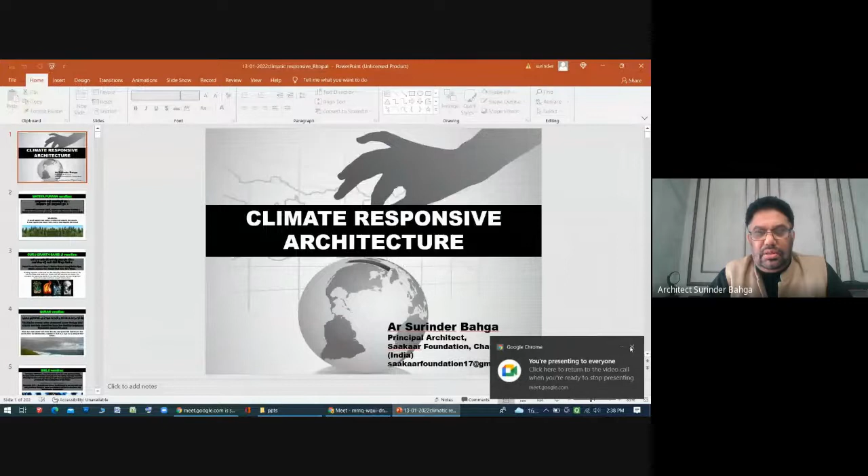First of all, I am grateful to Government Women's Polytechnic College for giving me this opportunity to share my thoughts on climate responsive architecture. Let me start now.

I would like to mention that in most of the holy scriptures of India, there's a lot of emphasis on saving Mother Earth and saving the environment. These are lines from the Puranas, a famous Hindu scripture. There is a shalok in the Puranas which highlights the importance of a tree in our lives. Likewise, in the Holy Guru Granth Sahib, there are a lot of shlokas, a lot of verses emphasizing saving water, saving Mother Earth, saving the environment.

And in the Holy Quran also, there is an ayat which says Allah has sent down rain from the sky and given life thereby to the earth after its lifelessness. Indeed, in that is a sign for people who listen. So these are the lines from the Holy Quran.

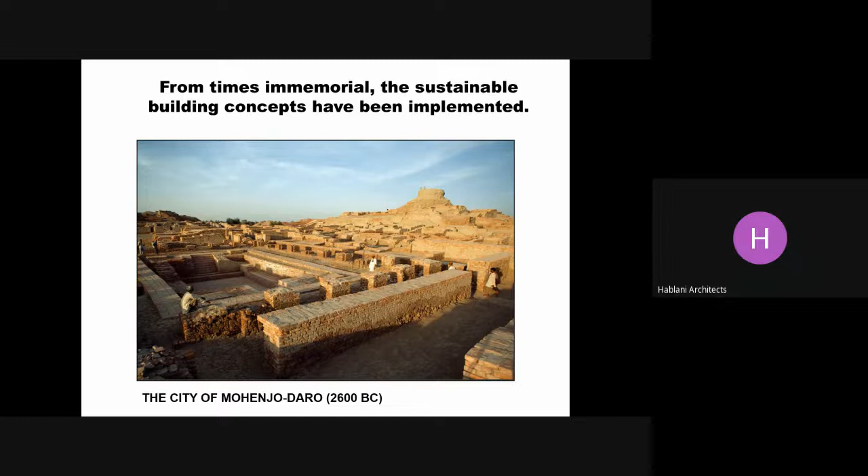Now let's have a look at the historic work done by our forefathers. This slide indicates the Mohenjo-daro township, which was built in 2600 BC. You can see from this picture that the planning of the building is done to suit the local topography, to suit the local materials, to suit the local wind direction, and all that. Accordingly, these houses were designed.

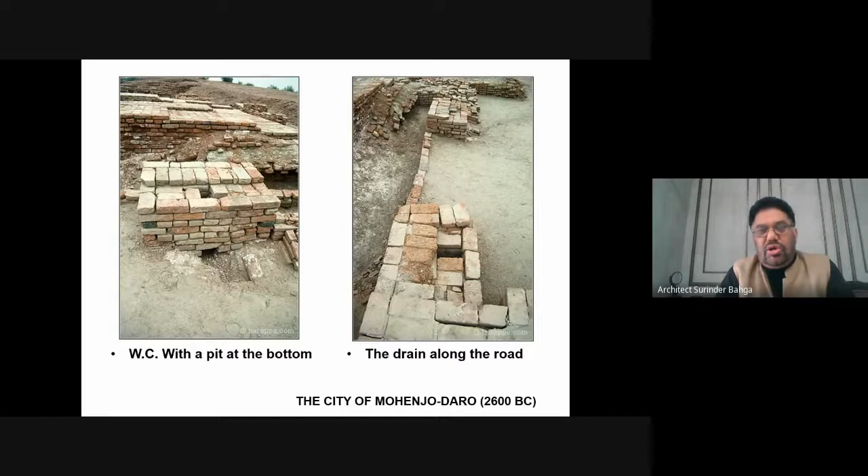You can see very modest houses, simpler, with jalis, and there are no windows and narrow entrances and no decoration. Mohenjo-daro township was the one which had a proper drainage system designed and in place. The digging done of this township indicated that there was a proper drainage system well laid there.

During the Mughal period, from 1526 onwards, for nearly 200 years, the architecture of India reached its full perfection. The work designed and executed during that period had passive cooling and proper energy efficient features, as you can see in this Fatehpur Sikri complex, where all the openings are protected with chhajjas or projections.

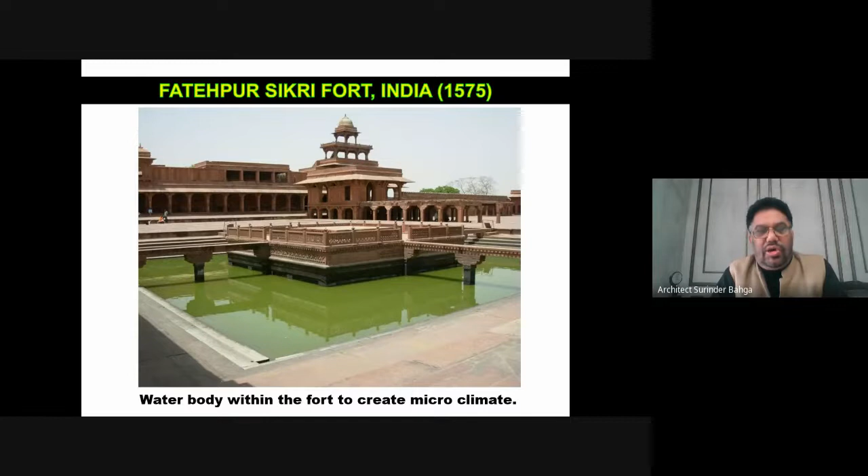There are small water bodies to create the microclimate, and in these Mughal buildings you can see these kind of deep verandas.

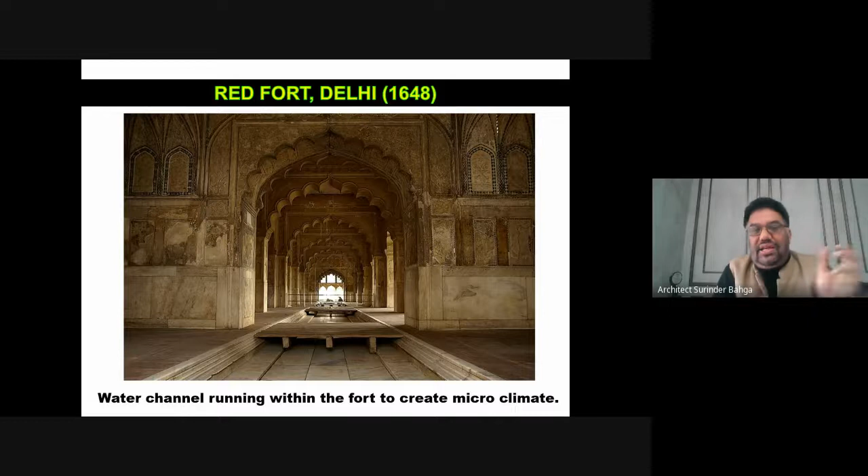In this slide, you can see a water running channel in the Red Fort, Delhi. In those times there was no electricity, so in order to cool the interiors, this water channel was operative.

In Jaisalmer, Rajasthan, these Havelis were built. Most architects have studied this. You can see the typical facade of this building, the Haveli, with self-shading balconies, small openings, local materials, jalis - all these features are there, producing architecture suited to the desert region.

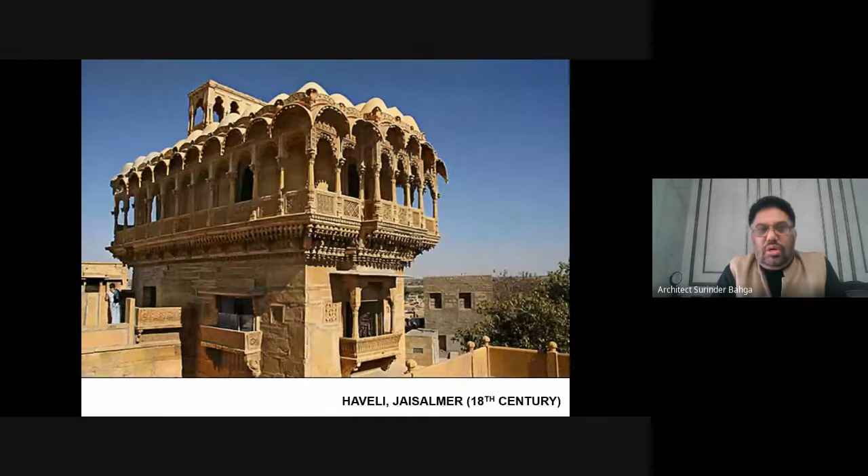Look at the facade of the Haveli, how it was intricately woven and self-shading. And they ensured courtyard planning because it was most suited to the Indian kind of climate.

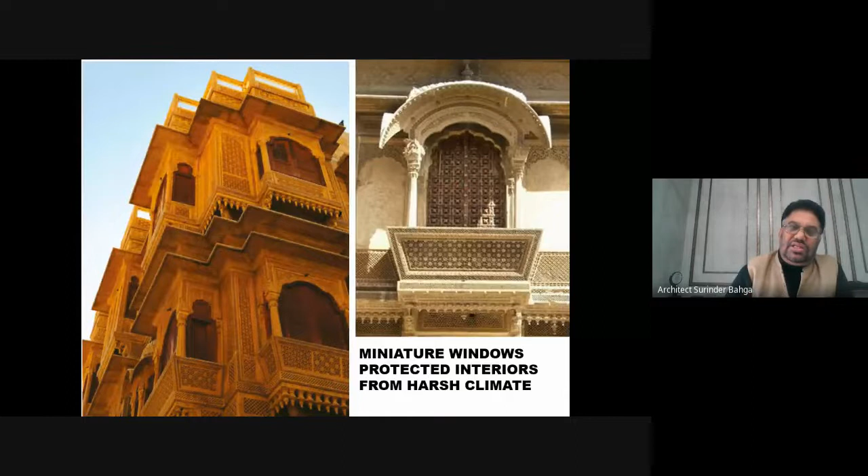How nicely they have decorated the facade and the balconies. The balconies are not only protecting the windows, but are also aesthetic elements in this scheme of things. And they opted for narrow streets because they are self-shading.

In Rajasthan, Gujarat and many other parts of India, our forefathers have shown us how to conserve rainwater with these kinds of rain collection tanks, which are aesthetically very pleasant and functionally exceptionally good. You can see these kinds of step wells in most parts of India.

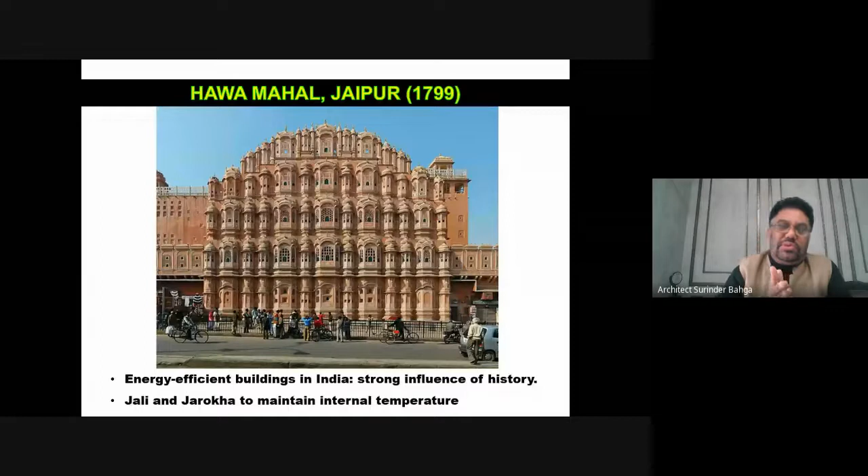Coming to Rajasthan again, this is the Hawa Mahal, built in 1799. These balconies were meant for royal women to remain in parda while they watched processions and other things happening on the street, yet they could enjoy the cool breeze. It was a wonderful experiment, because at that time there was no electricity.

Down south, in the 17th century, this Jahangir Mahal at Orchha - you can see in this picture very thick walls, projections, and small openings - all these features were there.

During the British Raj, in 1927, the famous British architect Edwin Lutyens designed this building, the famous Parliament House of India. You can see there's a veranda running around, which is a circulation core, meant to protect this building from the harsh climate. And inside you can see small windows.

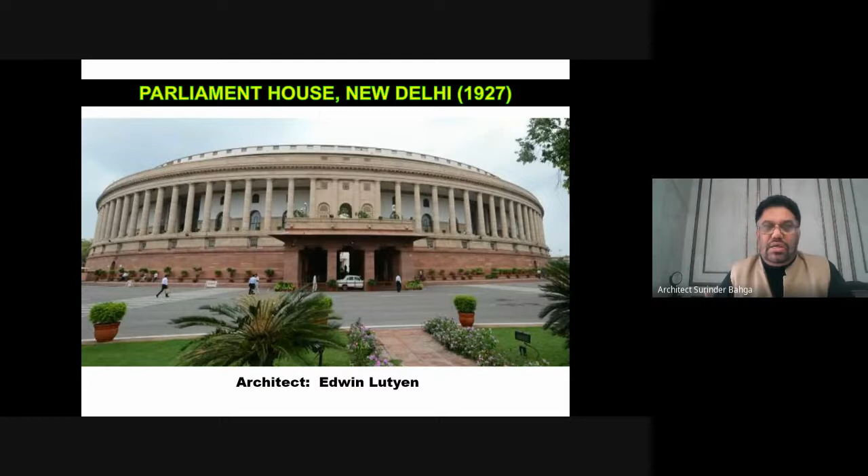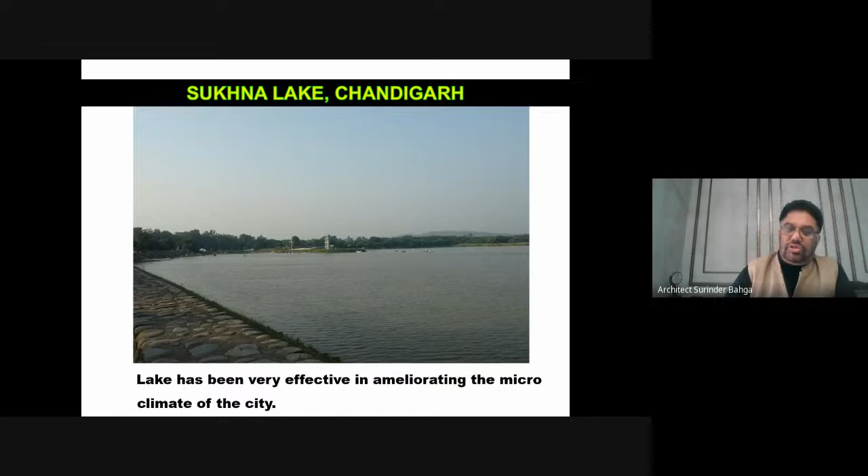Corbusier also created an artificial lake by damming two seasonal rivulets; rainwater was dammed and he created this lake, called Sukhna Lake. This lake has not only improved the water level of the city but also improved the vegetation around, and the microclimate of the city is also considerably improved because of this lake.

Chandigarh is probably the only city in India which has 35% green spaces. I was reading an article in Hindustan Times one day that said Kolkata has only 2% green spaces - look at the comparison of Kolkata and Chandigarh. And Chandigarh, to my mind, has nearly 1,700 parks in the city, which is quite a large number.

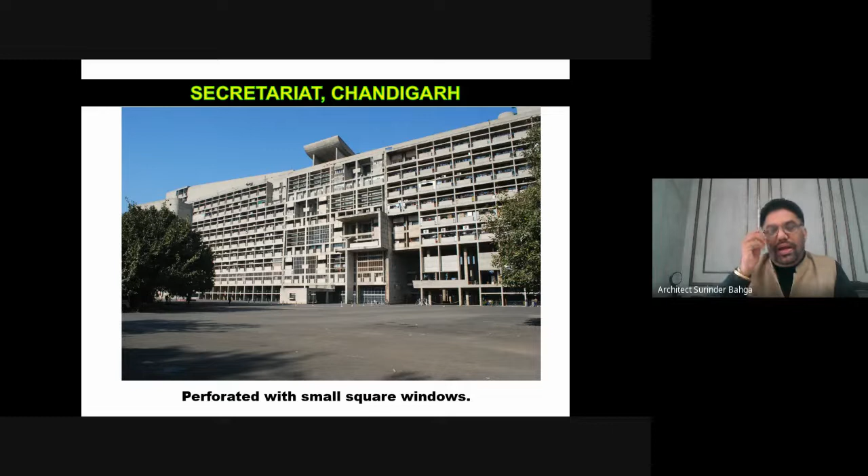This is the Secretariat complex. The glazing is about 3 to 4 meters deep. You cannot see glazing in this elevation. And there is a terrace garden on the top, and this building is oriented in the wind direction. Whenever there's any wind movement, this building behaves very beautifully.

In the middle of the 90s, famous architect Charles Correa designed this LIC building, and when it was executed, there was a lot of controversy about why he is using so much glass in a hot climate. But Correa has used glass very sensibly. He used glass only and only on the north side.

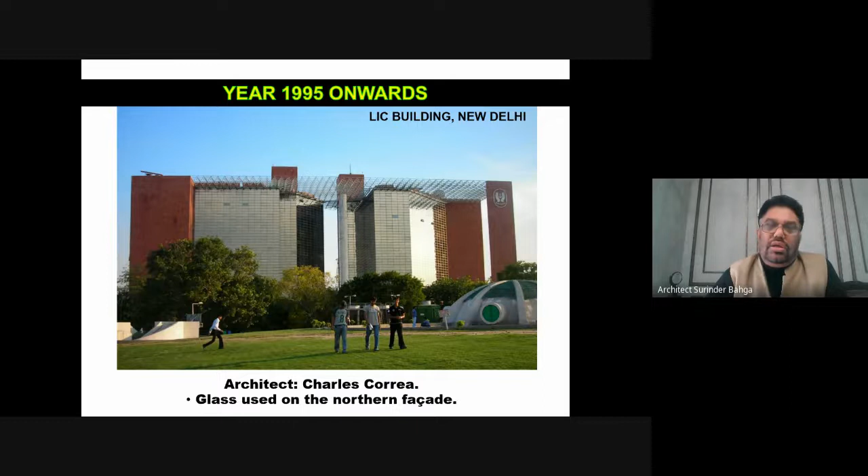And this is a building in Mohali. The architect of this project is a close friend. He designed a very, very nice building here. But when the building was almost 60% completed, a bureaucrat forced the architect friend to put glass all around. Because he was not agreeing, that architect was changed at the last minute, and a new architect was placed who agreed to put glass all around.

The positioning of the glass has nothing to do with the orientation. It is wrapped all around, and the building works like a furnace.

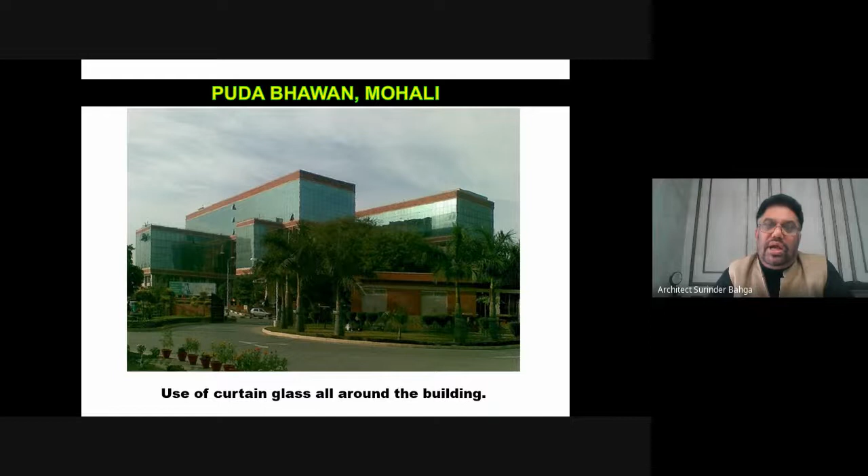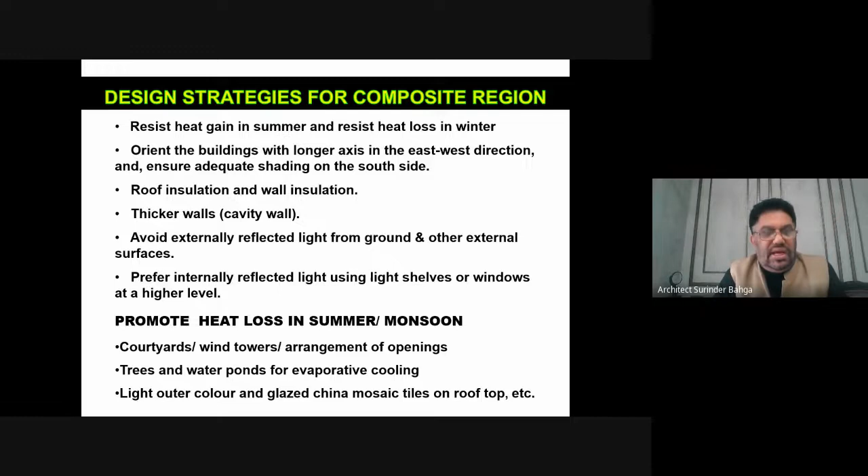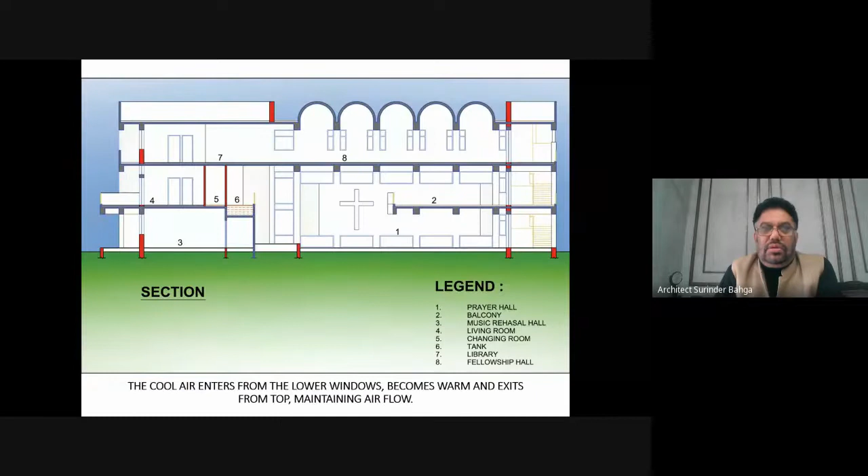You can see we introduced a cavity wall all around. In this plan and cross section, you can see the windows are deeply recessed, very narrow and small, with minimum use of glass and light colors. You can see the interiors - there's ample light during the day, but windows are minimal because they are properly calculated.

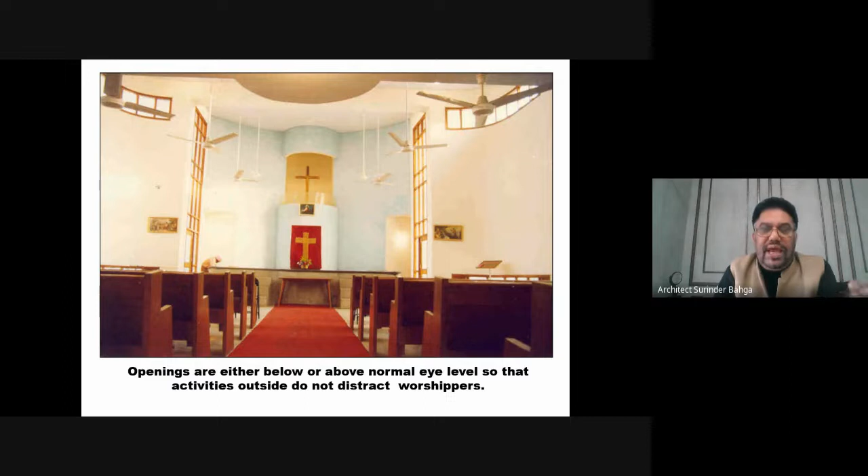The next building we did is in Punjab, Mohali, which is again a composite region. This was a Bal Bhavan, children's home. Here, because the western direction is very dangerous climatically, since the western sun emits a lot of heat which goes into the building, what we have done is club all the toilets and put all the toilet mass on the front side, which is the western direction. So the toilet blocks absorb the heat and the dormitories remain cooler.

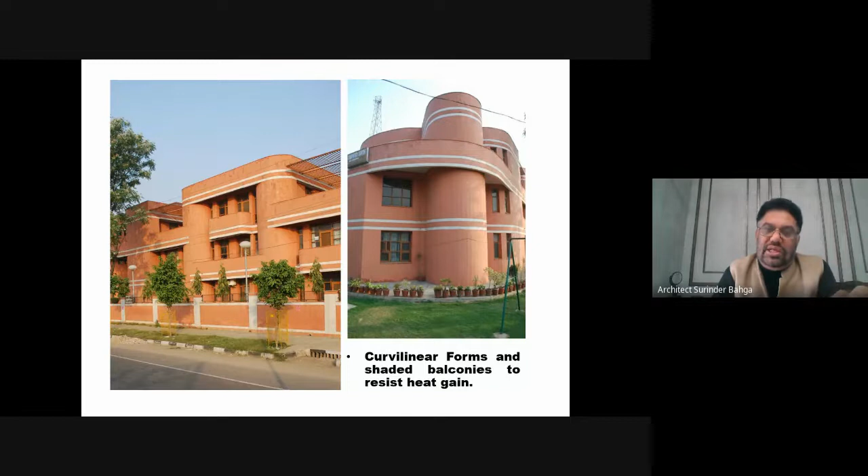Apart from that, you can see the deeply recessed or projected balconies and roof projections protecting the windows in these photographs. Windows are limited and put only where actually needed, and they are properly protected. Existing trees are properly saved on the site.

The next building in this category is a public school. A competition was held to design this school, and we won this project because the design brief involved a site with a large number of trees. This school belongs to the former Chief Minister of Punjab, Captain Amarinder Singh's family, and his mother, referred to as Rajmata, was the jury chairperson. She gave a brief to all participating architects that she wanted a building which would not cut a single tree from the site. So we designed this junior school building in a manner so that not even a single tree was cut.

While other architects gave a very flowery design for this junior school, widely spread out and cutting trees - somebody cut 10 trees, somebody cut 5 trees - in our case hardly any tree was cut. So that was the reason why we got this project.

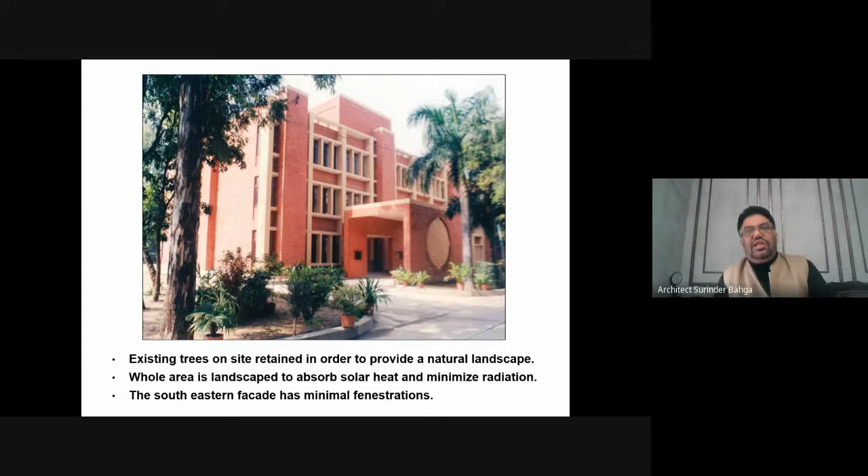You can notice in this facade of the school that again we have protected all the windows with proper projections and louvers. We opted for this design vocabulary because the existing school was designed by a very famous architect, J.K. Chowdhury, and this was an extension block, so we had to match the architecture with his school. J.K. Chowdhury designed some buildings in Punjab University and also IIT Delhi - he was a very famous architect of India at that time, in the 50s.

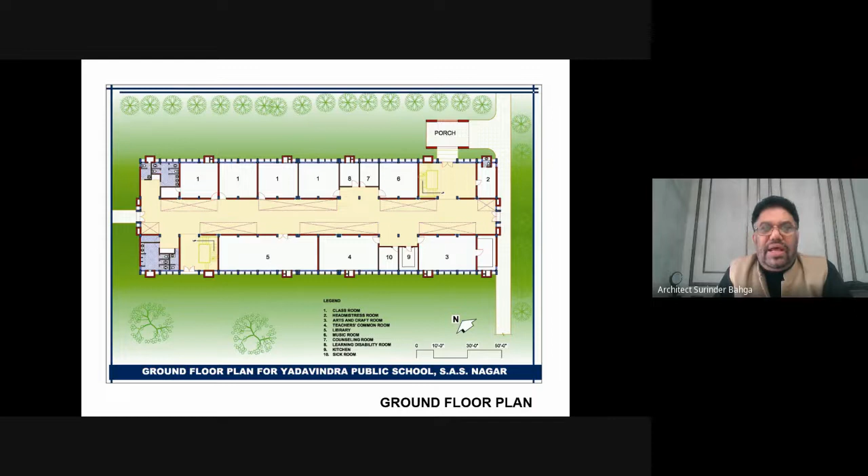You can see this is a new building, but all the existing trees are kept intact. In order to make it playful, we have kept a 7-meter wide corridor in the middle. In this corridor, you can see in the plan there are cutouts on either side.

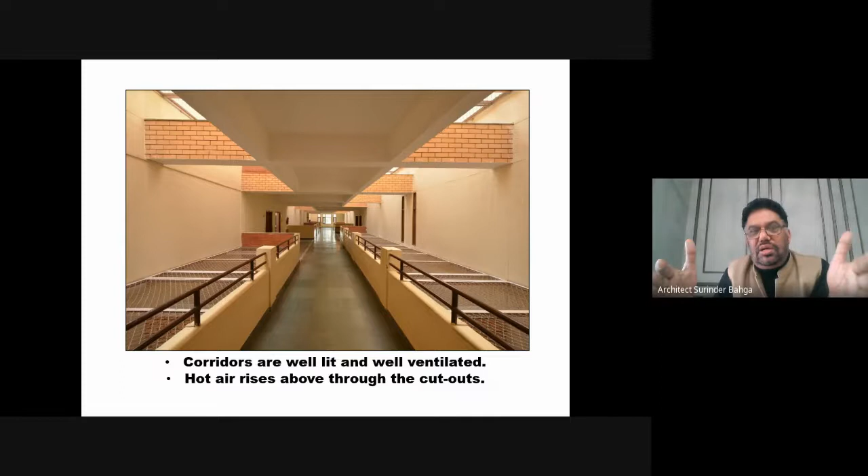These cutouts also insulate the classrooms from the corridor noise, because young children, when they move in the corridor, make a lot of gossip and noise. So the other classrooms are not disturbed when one class goes off.

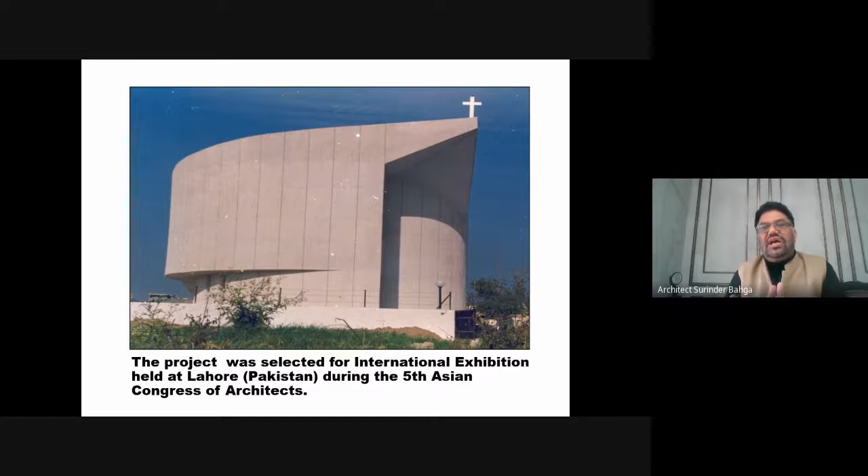This is the Church of God we designed in Chandigarh. This is a western facade, and we opted not to put any window on it. There's ample light in this church, but we have kept windows in other directions, or taken skylights, or some other measures to bring natural light inside. But the western facade is kept totally dark. The plan form.

Earlier it was a primary school. So we added a T-shaped block, added in such a manner that we utilized the existing singly loaded corridor, putting our block parallel to it. The new block is connected with bridges to the existing corridor. Again, very simple architecture, but this is what India needs to control our harsh climatic conditions.

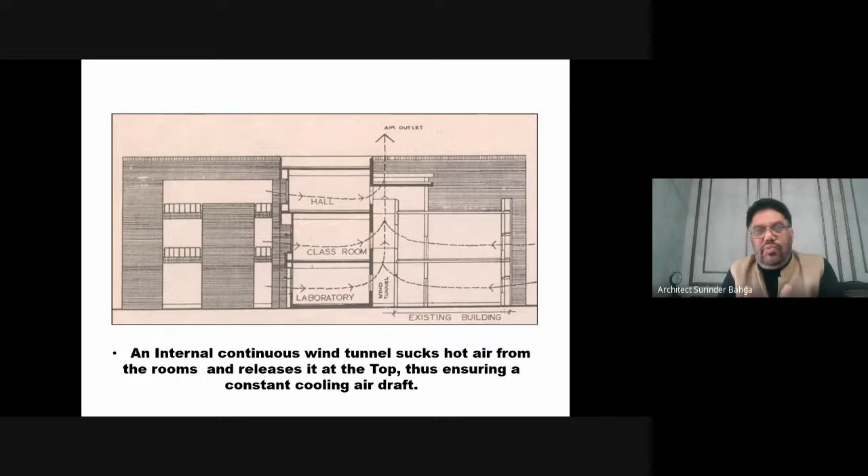You can see we created a sort of wind tunnel in between. On the right side we have a double-story existing block, on the left side a triple-story block, and both blocks are kept about 5-6 feet apart, and that gap works as a wind shaft. We covered the wind shaft from the top so that no rain can enter, yet light and ventilation remain intact.

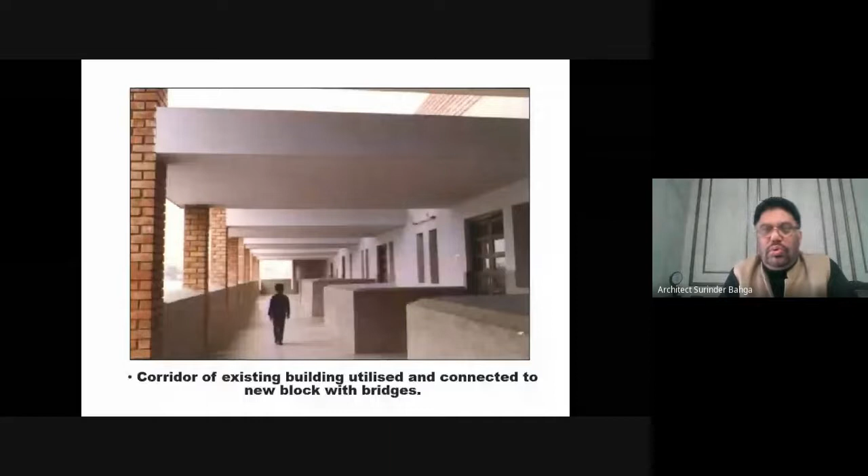This is how you can see the bridges connecting with the existing corridor on the existing roof, and on the right side is the new block.

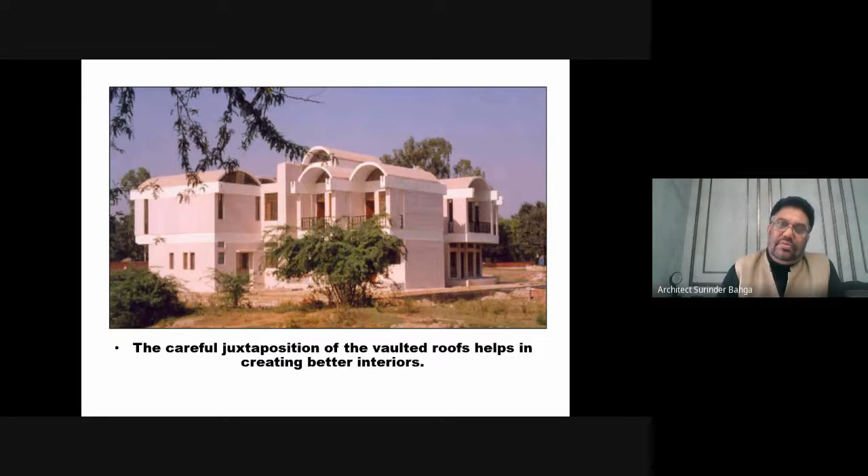These staggered balconies ensure privacy. You can see the rainwater spouts, and the deeply recessed glazing and doors.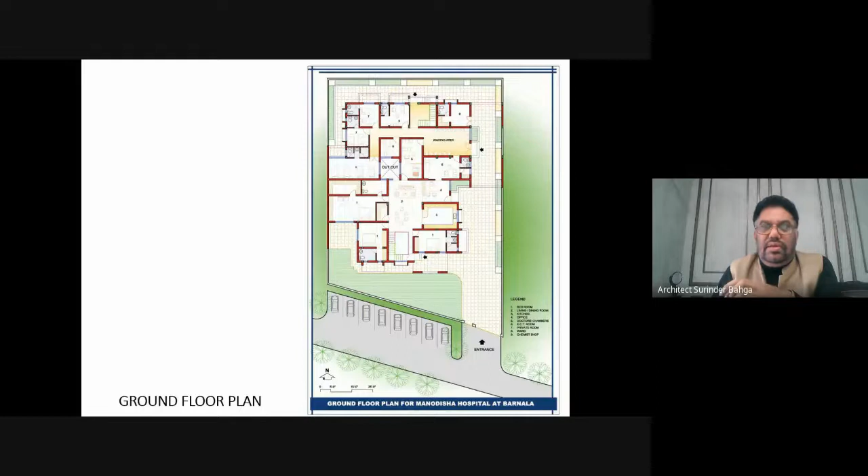Then we designed a mental hospital, a small hospital in Barnala town of Punjab. This is the one. Again, you can see how we protected the windows from top, bottom, and side, because this falls in a composite climate, and this is the only way to protect buildings from the harsh climate. There's a small cutout in the middle which facilitates ventilation. This is how we protected the windows.

Another facade detail. This is the area for patients, very nicely designed by an artist, with murals made on the wall.

Then we designed a Red Cross building in Chandigarh. This is the building. You can again notice the same parameters: all windows are protected, all windows are small, and the building's longer facade is facing north and south.

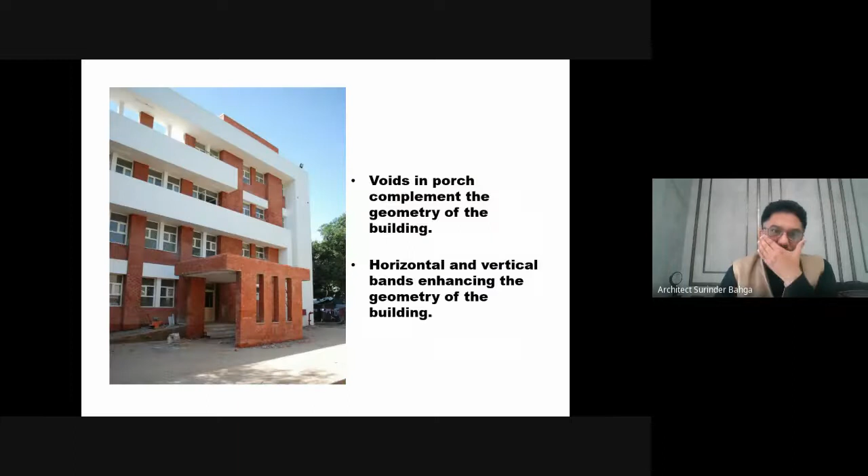These are other views of the same building. Then we designed a Christian school, Baptist school in Chandigarh. Again, you can notice we put all the toilet blocks on the western side. We designed two big courtyards in the middle, and some small courtyards also. On the external facade, we have protected all the windows with a combination of horizontal and vertical louvers.

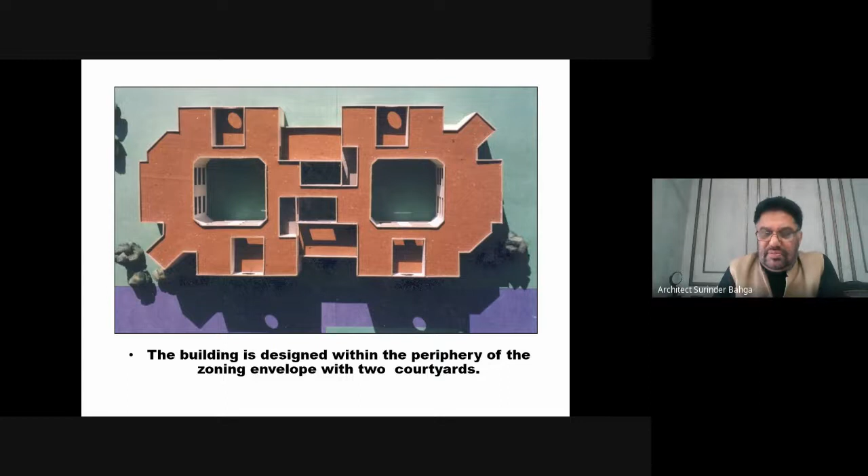This is the model. You can see the courtyards, how they are placed, and where cutouts are placed. Plan form.

Windows are properly protected. Courtyards, smaller courtyards, are covered from the top so rain cannot enter. Front facade, main entrance. Then we designed an ideas competition for HUDCO.

We got first prize in a competition organized by HUDCO, and this was the prize-winning model and sketch. You can see in this sketch we have provided earth berms and planters in front of the windows. You can see perforated parapets, and there's a staircase block in the middle having vents at the top. All these windows are properly protected, and upper floor residents are getting a terrace.

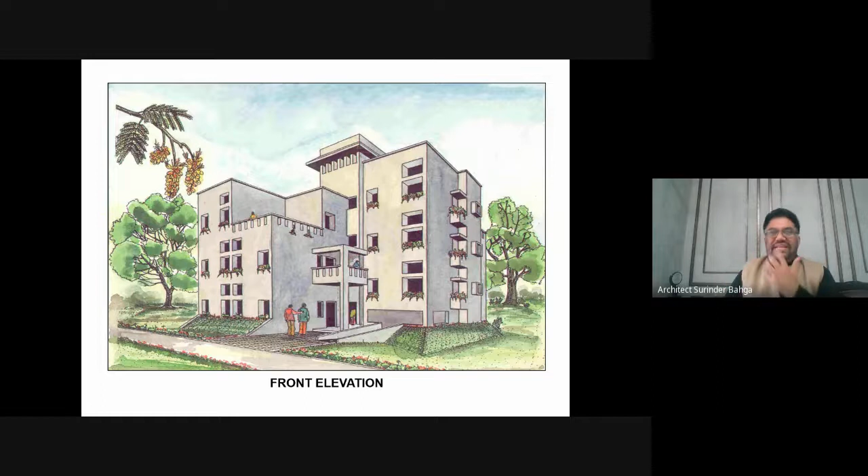There's no rocket science in this. These are very simple things which we can learn from history, as I said earlier. But gradually we have forgotten this, and we have switched over to glass buildings.

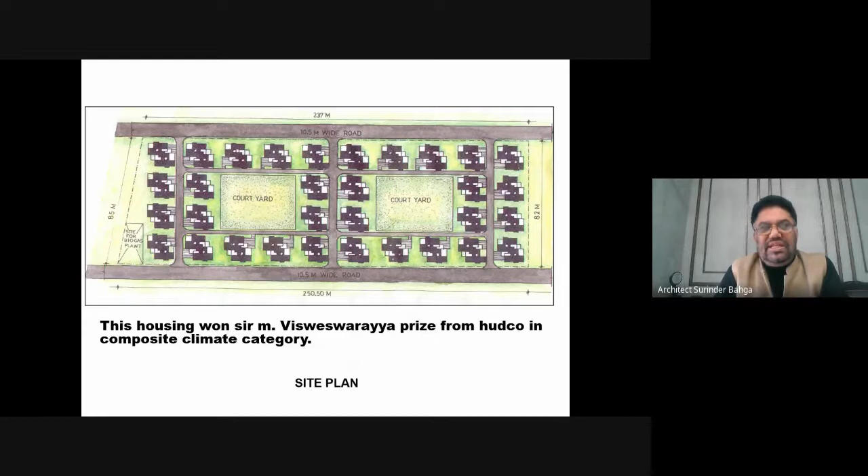This is the master plan of this housing project. Architect Anant Raje was the jury chief when we were declared the first prize winner in this project. You can see the courtyard planning, and these are the plan forms.

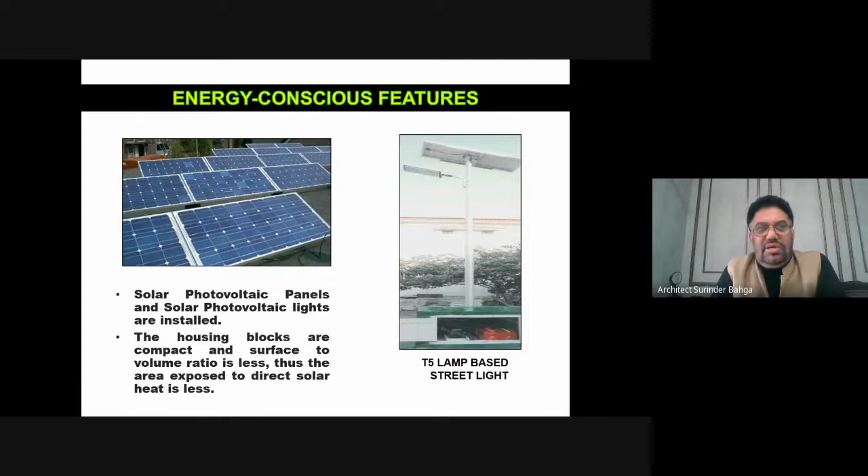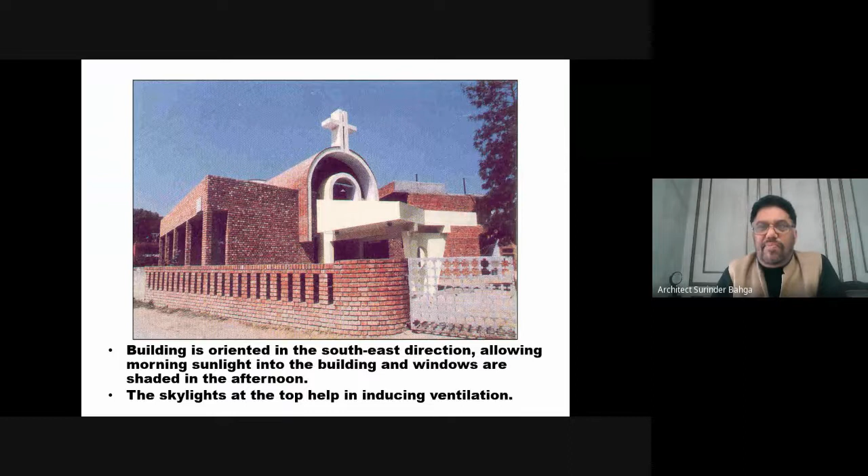Next is Lady Fatima Church, which we designed in Patiala. Again, the same fundamentals and same design strategies were adopted. You can see the plan.

All windows are protected with a circular wall, and this gives a cave-like environment in the prayer hall, because nobody can see outside or peep outside.

You can see these skylights, and they bring in the morning sun, as I was mentioning. These walls are protecting the windows inside - you can see the windows are behind these circular walls. And here is the skylight.

Then we got a chance to participate in a competition organized by the Ministry of Agriculture for a big convention center to be built in Delhi, and we won first prize in this.

In this convention center, the design brief was that we had to design a building which is energy efficient. The result is we designed this project, with the entire roof slanted towards the southwestern side, and the roof made of solar panels.

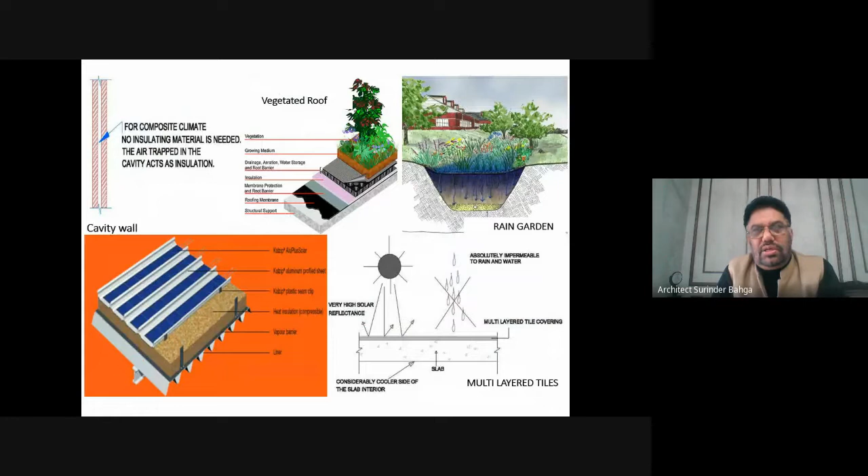We retained the existing trees in this project, and we also introduced plants which consume less water.

So these kinds of features were introduced, and all the details were submitted to the ministry, and the result is that we got a first prize in this too.

Then in the recent past, we designed a residential complex for officers of the Reserve Bank of India at Jammu, and we submitted our proposal. In this, there are different categories of houses.

We have given calculations on how we can minimize the wastage of water, how we can segregate solid waste, and how we can harness solar energy, how we can play with the orientation, and all those features.

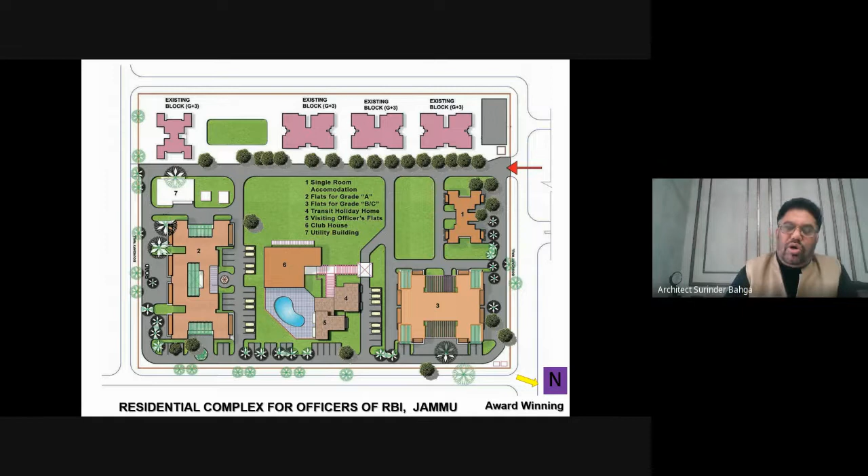We submitted this, and as a result we got a third prize in this All India competition. These are some pictures, sketches and visuals of the same project.

Then we got a chance to design a university campus in Punjab near Ludhiana. The front side was the northern side, and we faced a lot of opposition from our client.

He wanted the buildings to be placed parallel to the road, but we insisted that we should orient the buildings north-south. So anyway, we prevailed upon him.

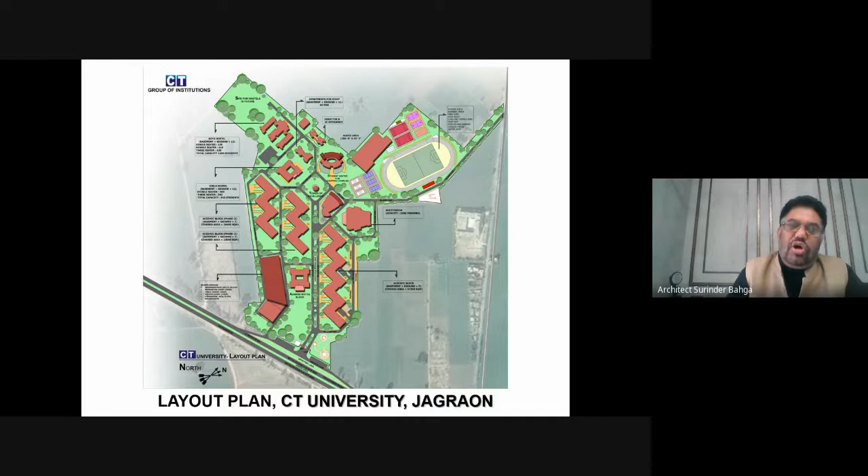We designed all the buildings, mainly academic buildings, facing north-south, because north-south is the best orientation in our kind of climate. You can see these are the academic blocks.

All these classrooms and attached areas, libraries, computer centers - their openings are all directly facing the north or the south side. This is the model. It's a huge project costing more than 300 crores in phase 1.

Then we designed hostel blocks for postgraduate students in NIT Kurukshetra in Haryana state. Here also, we introduced similar features.

We introduced courtyard planning and thick walls. We also protected all our glazings with balconies. These balconies were specially introduced so that students can use them as outdoor areas for drying clothes or sitting outside whenever there's an electricity failure, and so on.

It's a huge project having 12 blocks, and nearly 1,000 postgraduate engineering students are staying in this complex.

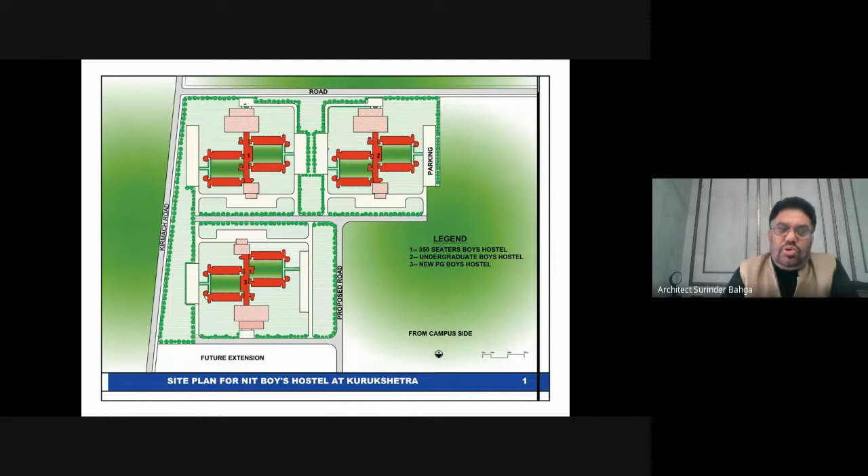This is the plan. There's a huge dining block in the middle. You can see the courtyards, and all the buildings are connected with a central spine, which connects the hostel blocks at all levels.

You can see the courtyard, the deeply recessed glazings, and the balconies.

Then a very, very small project in a remote village in Punjab - it's a library, this is the one. You can see in this library we have given smaller openings, and the openings are kept at a certain height.

We wanted the book racks of the library to be placed along the external walls, because the book rack itself would act as an insulation material.

So that idea worked, and this building is known as the Green Library in Punjab. And on the terrace, we got a system designed, which you can see on the terrace.

There's a cooler kind of equipment. It sucks the hot air, cools it, and the cooled air is thrown down into the interior through ducts.

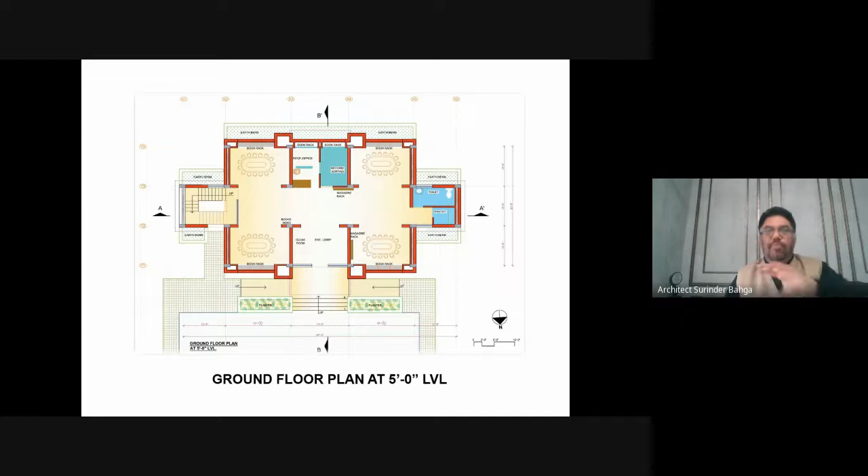You can see the ducts. The building has cavity walls on the eastern and western side. You can see in this plan that openings are only on the north and south side. Openings are kept above the book rack height, and the racks are placed along the outer wall.

Now these are the details, and the result is that we never needed any fans or air conditioners to run this library, and the building works very beautifully.

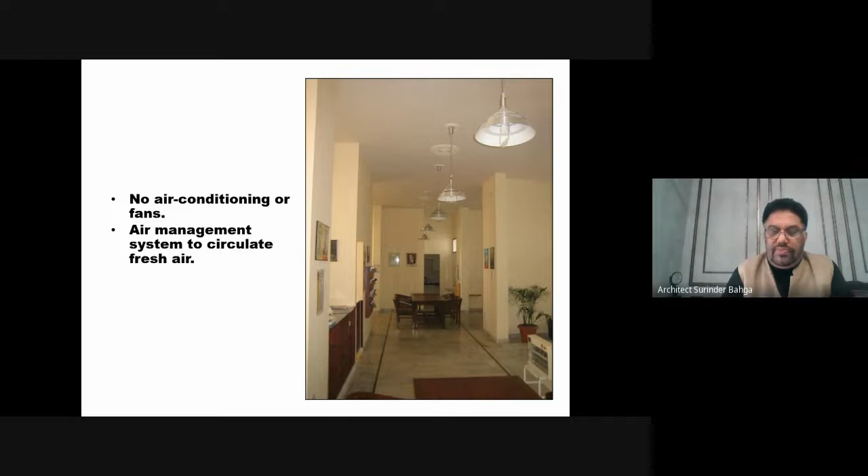So with this, we close on one part of my composite climate region, and now coming to the next one: the hot and dry region. How to design buildings in hot and dry regions, which is Rajasthan and parts of Gujarat.

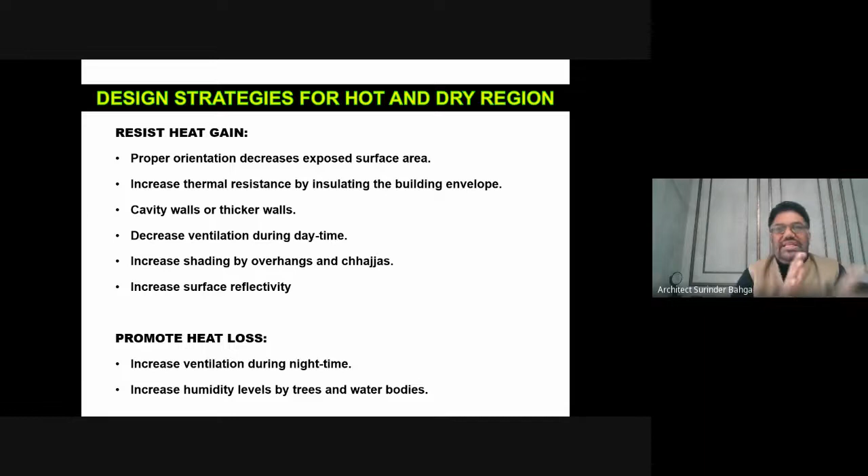We got a chance to design one housing project here. What we did was design this project with the motto that we have to resist heat gain and promote heat loss. How can we do this? Because basically orientation plays a major role. I will explain the project itself.

You can see this is the housing township, having nearly 900 houses. It is meant for the Indian military. In this project, 99% of the building blocks are facing north and south.

Because in Rajasthan, when we design buildings, this is the best orientation - the longer side is kept on north and south. I gave 16 presentations to the Indian Army to convince them that this is the only way to design this township, but they were not agreeing originally. I had to go to Delhi 16 times to convince the army generals.

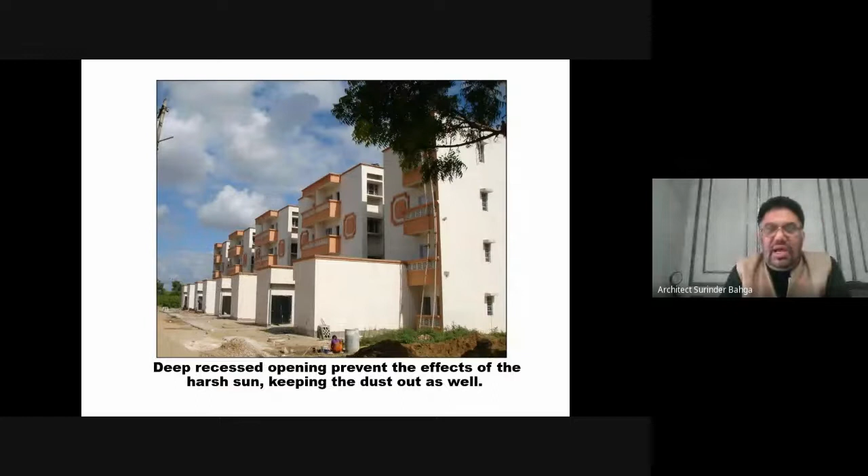But finally, we convinced them. You can see this - we use light colors again. We protected our windows properly. Deep balconies are there for sitting outside, and self-shading facades are there. You can see the self-shading facades. And we retained all the existing trees, whatever little trees were there in the desert. That was one illustration of how we should design buildings in a hot climate like Rajasthan.

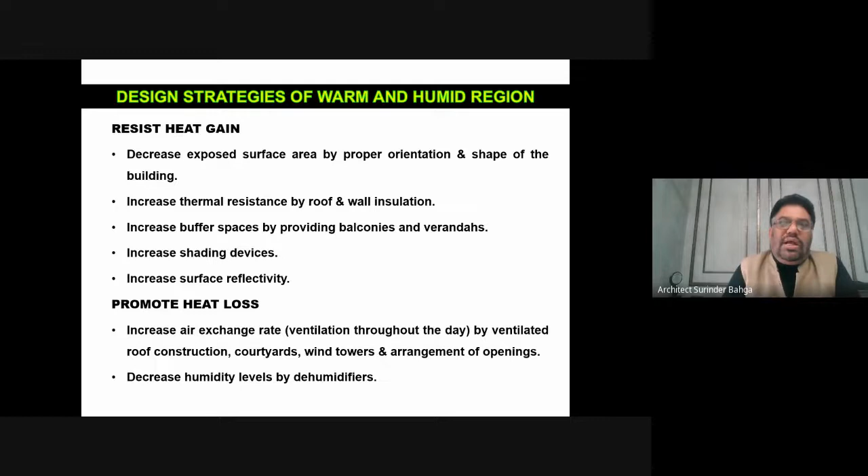Next is a climatic zone called warm and humid zone. We got a chance to design certain youth hostels in West Bengal, Odisha, and Assam, which fall in this belt. Here the design mantra is we have to resist heat gain and promote heat loss, and the basic intention of designing buildings in this region, as most architects know, is that we need to promote ventilation.

So what we did was opt for a plan with a lot of small windows, and the moment you open the windows, you get a lot of ventilation, and the building remains cool. We get a lot of rainfall in that area, so there was a need to select a color scheme to suit those climatic conditions, and a need to protect the windows from all sides because of the huge rainfall in that belt. That's why we designed this kind of facade.

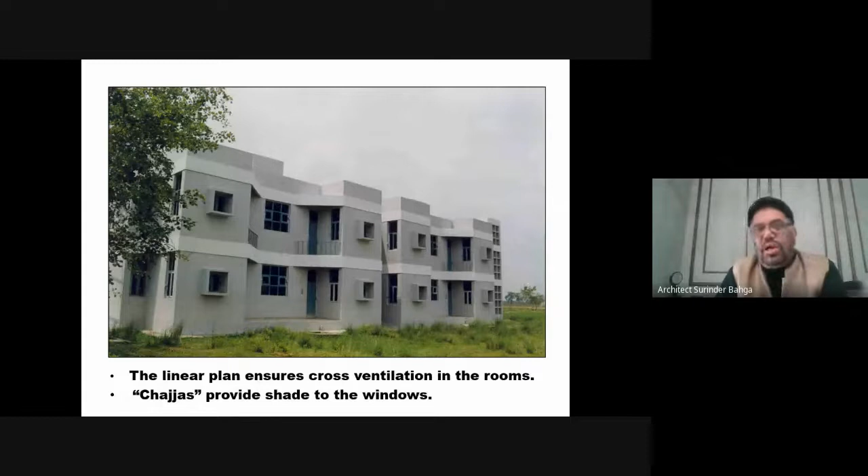Because of rainfall, we opted to have rainwater spouts, because rain pipes get choked in such public buildings and then the roofs start leaking. We also introduced this kind of concrete jali to facilitate ventilation in that area.

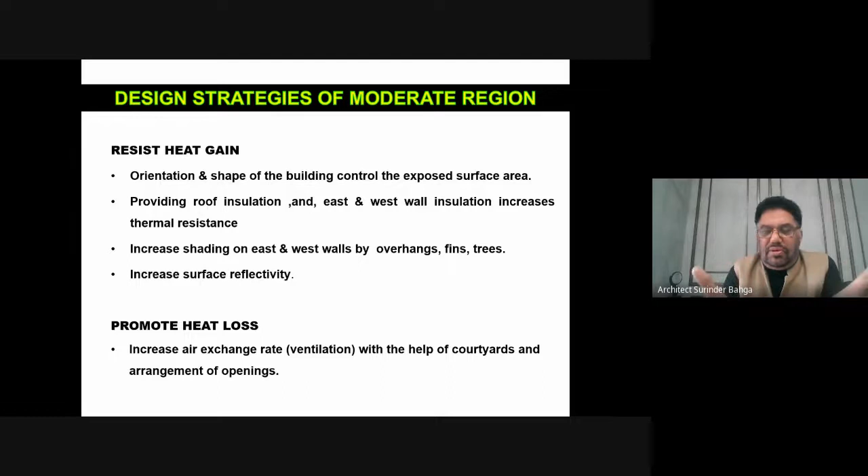Next is a moderate zone. When we design buildings in a moderate region, we have to resist heat gain and promote heat loss, almost similar to the other categories, but here the climate is comparatively less harsh. So architects can take a little liberty to design buildings with better flexibility. We never got a chance to design any building in this region, so we are taking some examples from other architects.

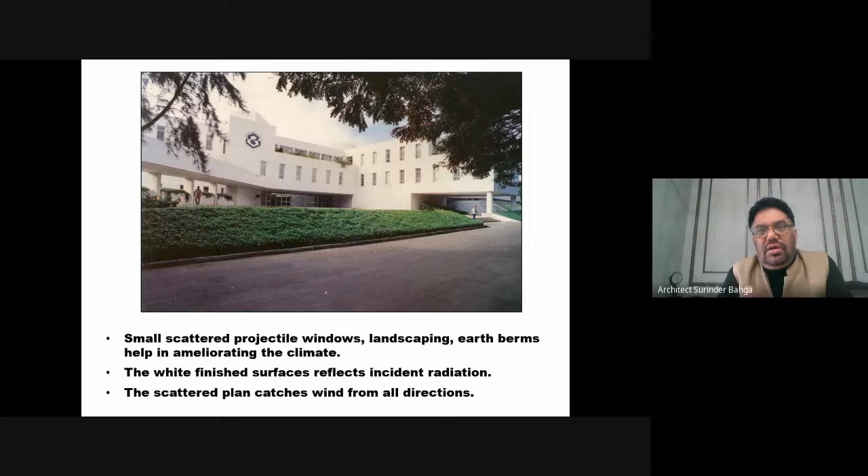Bombay's famous architect Rumi Shroff designed the Bajaj Auto corporate office. Here you can see earth berms, small openings, vertical windows, staggered windows in the plan, and white color exterior of the building. This is how he brought natural light into the atrium, because this is a requirement of Indian architecture.

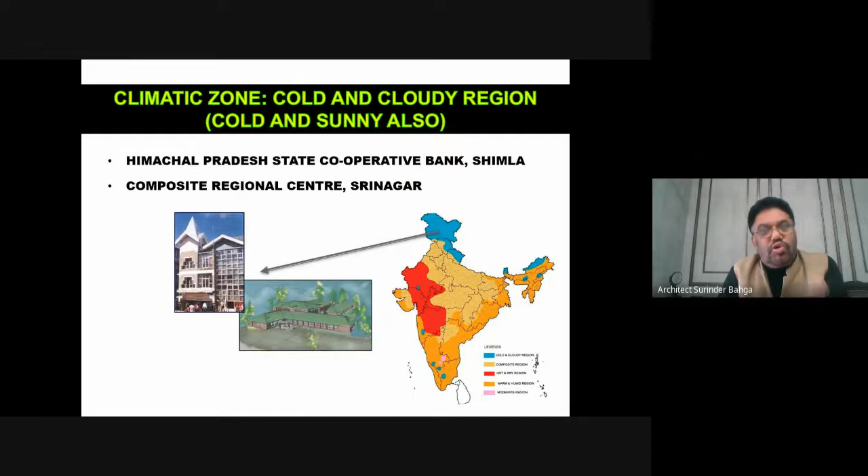Next is the category called cold and cloudy region, which is Jammu Kashmir and parts of Himachal. Here the design strategies are totally different. We have to resist heat loss and promote heat gain. It is highlighted because in a cold climate we need more heat.

I'm borrowing this example from famous architect Ashok B. Lall's very small project in Shimla, a cooperative bank. You can see this picture - there's a glass screen on the front side, and behind this is a solid wall.

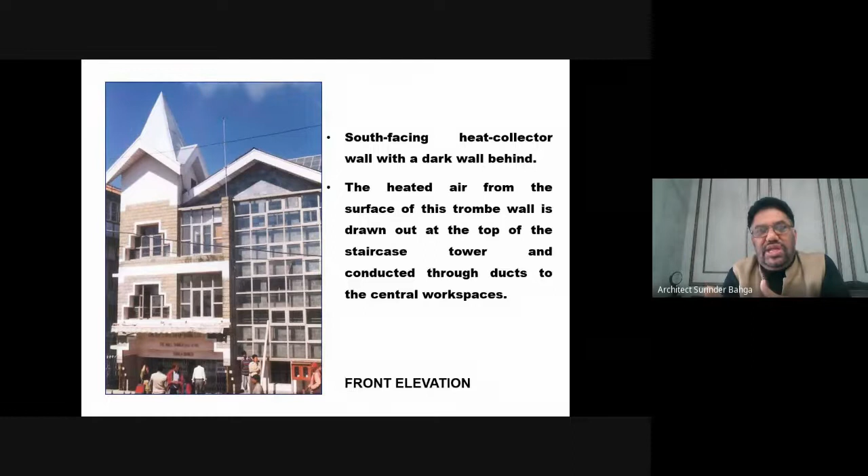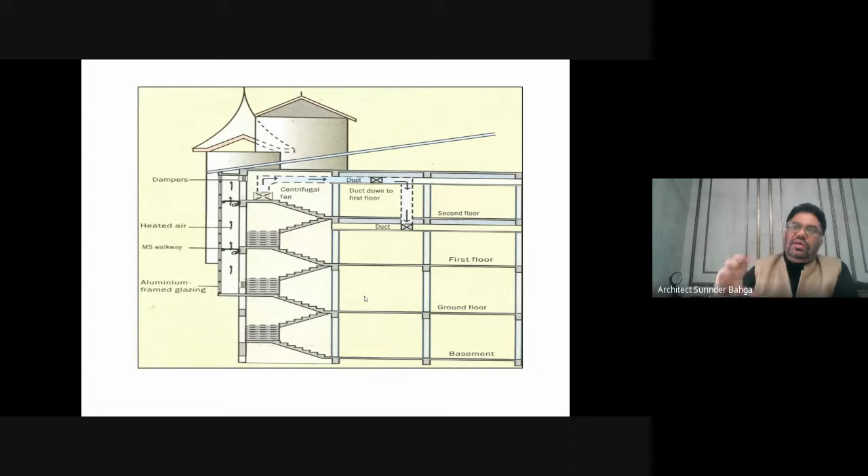It looks very strange, but how it works I will show you in cross section. You can see there is a glass screen. When the sunlight falls on this glass screen on the front side, it heats the air between the solid wall and the glass wall, and the heated air naturally goes up, and is then taken to the interiors of the bank through ducts. So during sunny days, the building gets comparatively heated up with natural sunlight.

And the result is there's much less expenditure on heating this particular building during the winters.

We got an opportunity to design a composite regional center in Srinagar, Jammu Kashmir. This is the project we designed because we have a lot of snowfall in that belt, and people complain that snow, when it falls, gets accumulated on the rooftop. Either it is required to be cleaned mechanically, or manually. So then I studied how we can solve it.

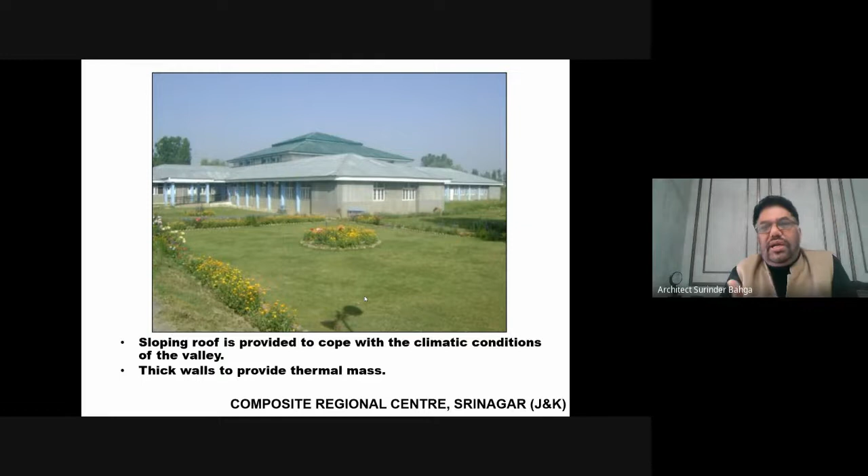Some mason in Kashmir told me that if you keep a particular angle of slope, then snow falls automatically down. So I said okay, let me do it. We did it, and there was never a requirement to clean the snow - it falls automatically on its own.

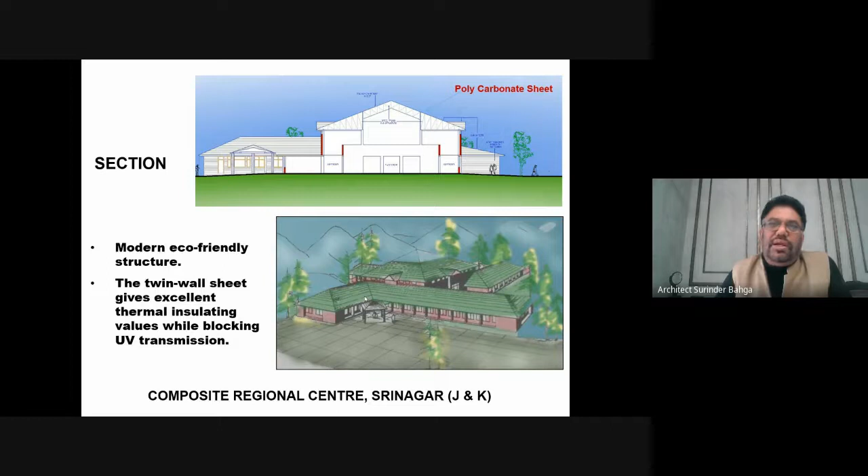The next section of my presentation is about what we normally call energy efficient buildings. We all know that buildings consume energy in heating, cooling, lighting, water heating, and running appliances. An energy efficient building is one where with our inputs we are able to reduce the consumption of energy - that is a simpler definition.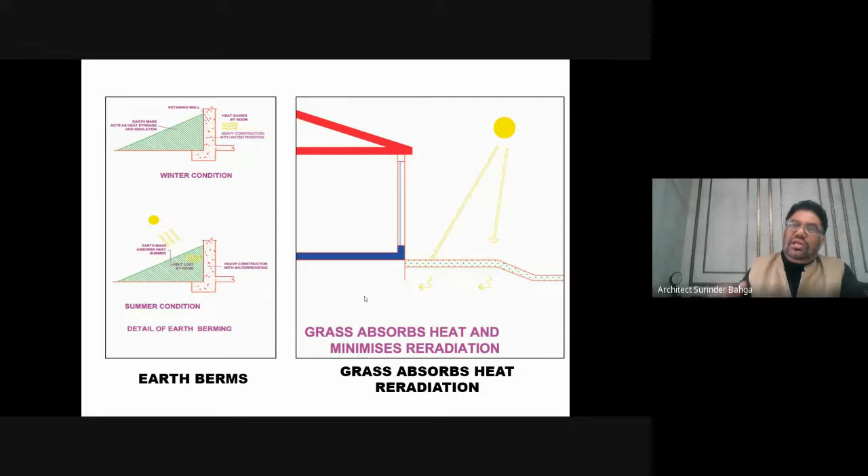We can create an atrium in the middle. We can shade our windows. We can put trees on the western side, and we can put some escape route from where the hot air can escape from the atrium. And we can keep some margin to put solar panels on the rooftop.

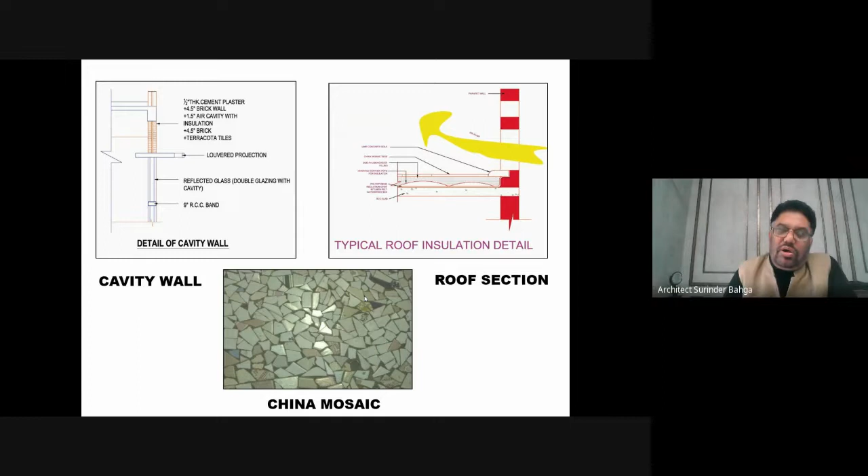So these are some of the tips for designing climate responsive buildings. We can have cavity walls, cavity roofs, and use reflective materials on the roof terrace, like this China mosaic in this particular slide. This China mosaic is used in the Sangath complex of Balkrishna Doshi also in Ahmedabad, with the same intentions.

When we choose the building plan shape, we should opt for compact buildings. The compact buildings consume less energy. If we increase the surface area of the buildings, they consume more energy.

Then this is the last segment.

There are various technologies and concepts available around the world from which we can learn something. Today we have a technology which can transport sunlight from the rooftop without having any batteries. You put the solar panels on the rooftop and don't use any batteries, and that solar panel can directly bring

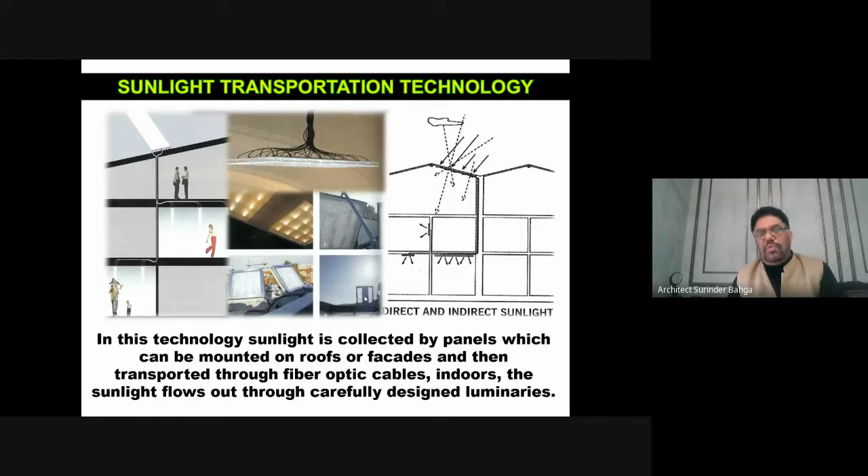light into the third deep basement with the help of fiber optic cable. This technology is available, and I have seen that there's no need to cut the trees now. This kind of mechanism is available to transplant the existing trees at some other location.

I have even seen in Surat Municipal Corporation, the grown-up trees are sold to the builders at a price of something like 2 lakh rupees. Builders have townships outside the city where it takes years to plant and grow trees. So they are buying trees from the local municipal corporation which are planned to be cut, and those trees are uprooted and replanted outside on the city's boundaries where new townships are coming up.

Then, where we have less area and need more light, this is a concept called solar tree. It's designed by a very famous designer called Ross Lovegrove, who designed this concept. He said we can have more light where we have less area, we can plant this kind of solar tree. And we in Chandigarh have designed this solar tree in Mohali. It is already working there.

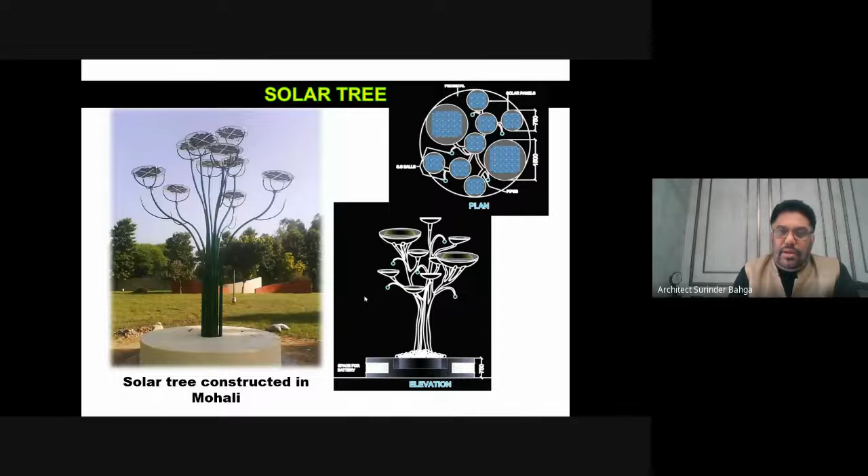And a lot of research is going on to design green elevators. Engineers are working on this, that with the movement of the trolley we can generate electricity, and with that electricity the elevators can be run.

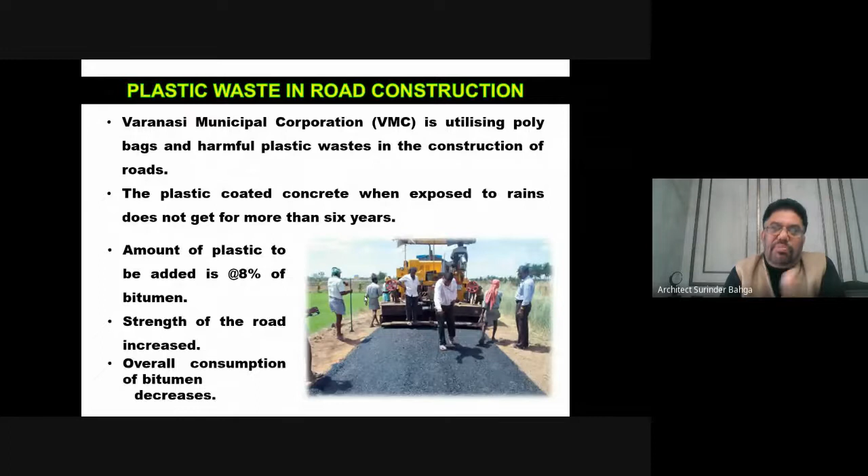In Varanasi Municipal Corporation, they are doing something great. We all talk about plastic waste - what to do with plastic waste in our cities. So Varanasi Municipal Corporation uses this waste in road construction, and they have experimented with it, and it is found to be very successful. They used 8% of plastic waste in the bitumen, and they claim that roads become waterproof and have a better and longer life. At the same time, they are utilizing the plastic waste also.

Another new concept is urban agriculture, or what we call vertical farms. Professor Dickson from America came up with this unique concept. He says with growing urbanization, we are losing agricultural land, so what is the way forward? He says we can think of having agriculture on our buildings, and he has demonstrated how we can do it. He has his own logics and reasons for the advantages of urban farms.

He says you can produce more in less area. He says weather cannot affect these crops if they are grown in a controlled environment, like within the building. And as a demonstrative project, there's this project in

Tokyo called Pasona Urban Farm, designed by a New York-based firm, Kono Designs. They designed this urban farm nearly 10 years back. It's a 9-story tower. On this whole facade and interior terrace, they are growing vegetables and creepers. They claim that all the employees of this building use vegetables and fruits which are grown within the building. This is the basement of that building - you can see how the crops are grown in this project.

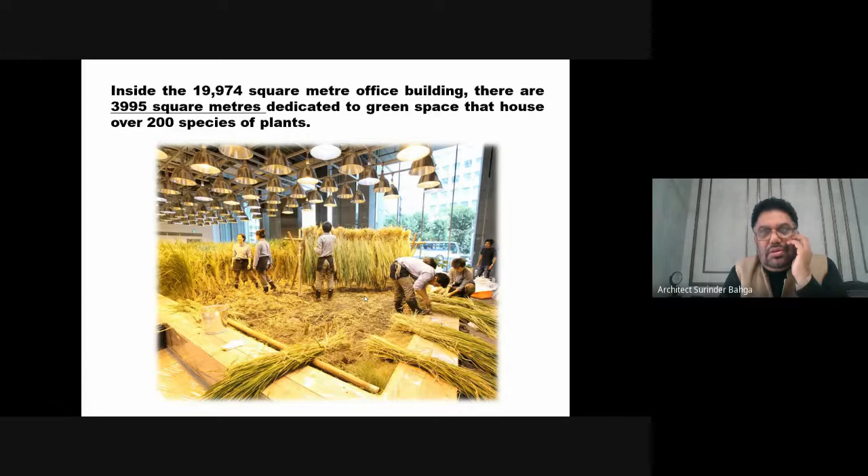Then another technology - there are energy generating pavements now. These slabs are made of 100% recycled rubber, and they are used on pavements, and they can produce a certain amount of electricity with the footfall.

Then nano glass - new technologies are advocating nano glass. They say it's water repelling, dirt deflecting, and so on. In Chandigarh particularly, we have experienced that all the buildings designed by Corbusier in exposed concrete got blackened with the weathering effect. So this Jubilee Church is made with a new kind of technology, with a new concrete which never gets blackened.

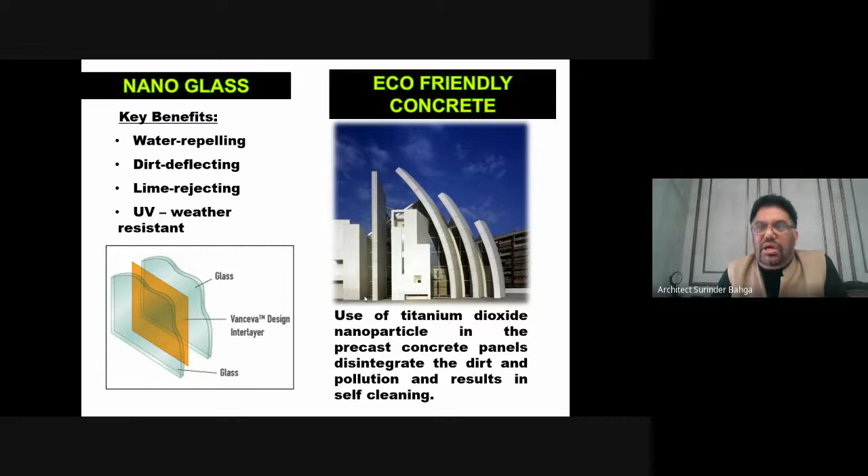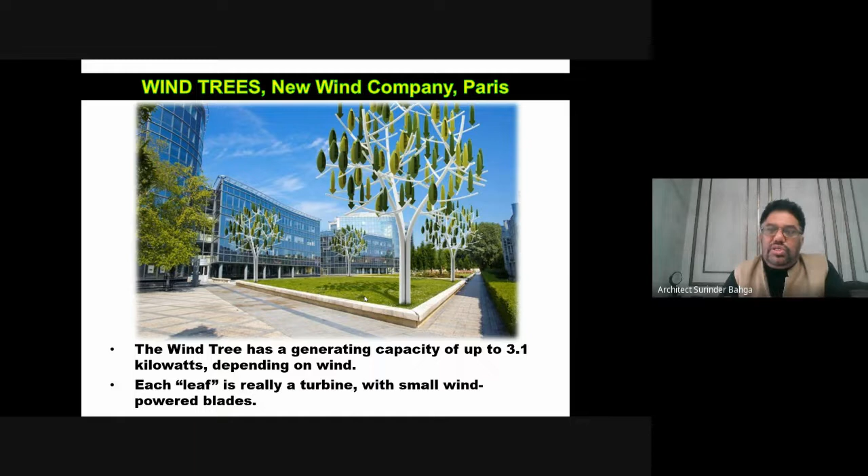Then, like we discussed solar trees, now there is a new concept catching up called wind trees. There's a belief that we need wind turbines where we get a particular speed of the air, because otherwise wind turbines never work. But some engineers and scientists have come up with this new concept called wind trees, and they claim this kind of wind tree, if installed as you see in this picture, can produce electricity from a very low wind speed of even 7 kilometers per hour or so.

You can see the close-up of the leaf design in particular. They catch the slow moving wind and convert that wind into energy. We are using this concept in one of our projects now.

Another theoretical proposition some architects and engineers are working on is a model of solar towers. What is a solar tower? It is claimed that when we design multi-story buildings in very downtown areas like New York and Manhattan, the roof terrace area is so limited, and it's occupied by water tanks, lift towers, and other equipment. So there's hardly any space left on the roof where solar panels can be placed. So what is the option?

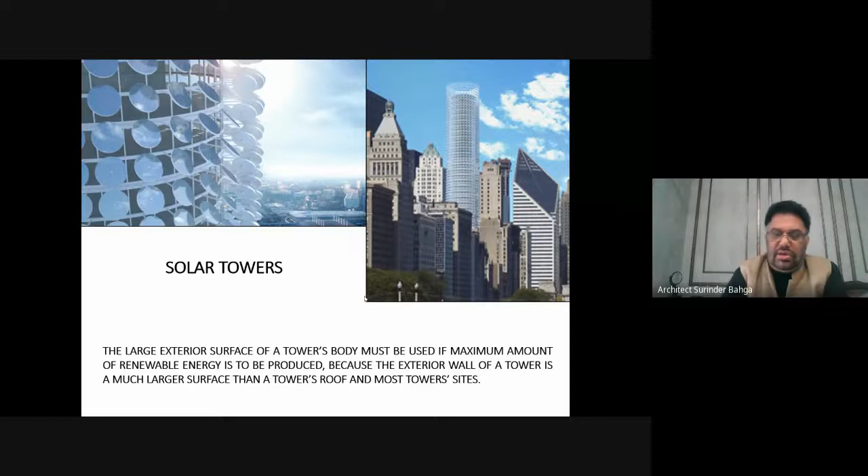They say you can design these kind of solar towers. You can see in this photo close-up on the left side, there's a round shaped disc kind of structure. This disc is a sun-tracking solar panel. It moves according to the sun's direction with sensors, and the team working on this concept claims that if this system succeeds, this sun-tracking solar PV panel in disc shape can generate more than 30 to 40% more energy than any conventional building. It's a very unique concept.

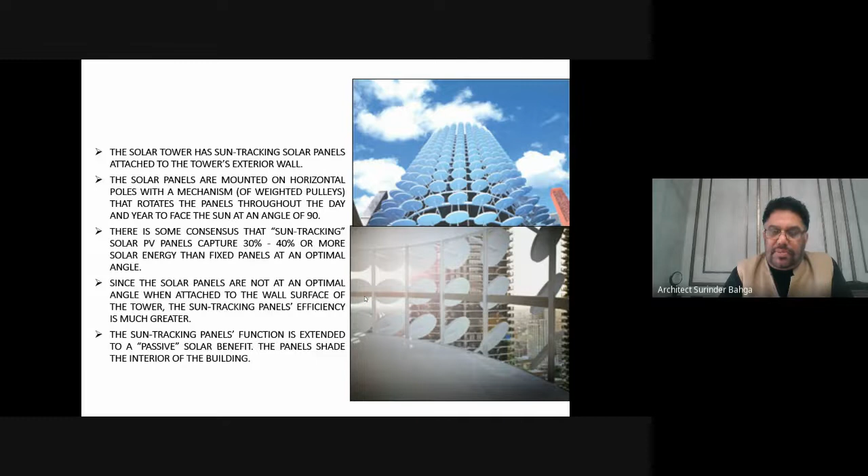Earlier we used to believe that when we have a vaulted roof or an angular roof, we cannot have solar panels on it. But now technologies and materials are available so that even on a circular vaulted roof or an angular roof, we can have solar panels. So it is very much possible now.

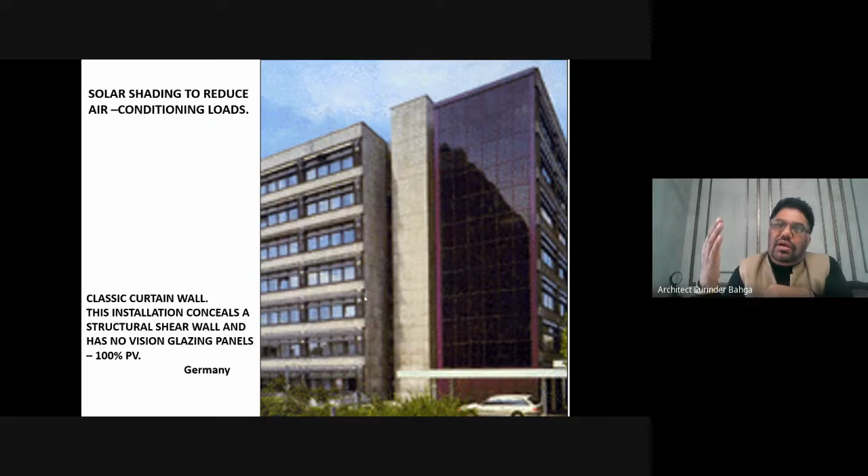When we don't get enough area on the roof terrace to put solar panels, what do we do? We can clad the buildings with solar panels. We can design, in this particular building, sun shading devices made of solar panels. It's in Switzerland, not Germany - it was wrongly typed by me.

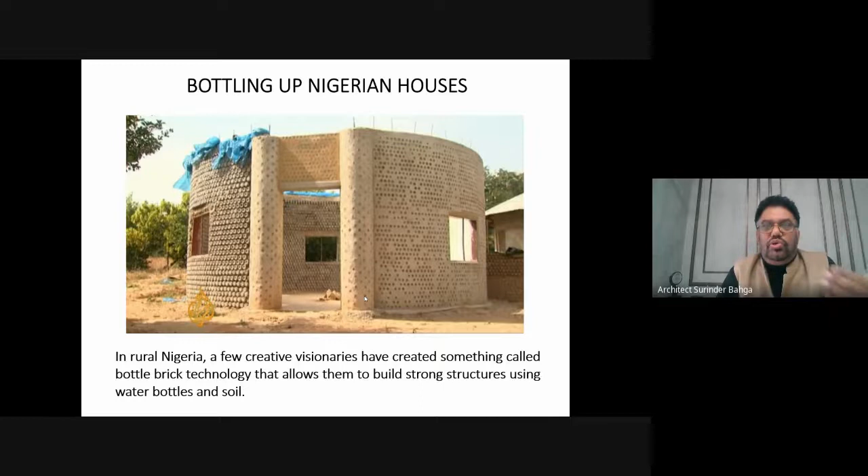So these are some of the ideas and success stories shown to you, about how we can use waste materials, how we can harness energy, and what is the way to design buildings.

The conclusion of my talk is that India is a huge subcontinent divided into 5 climatic zones, and each zone has its own guidelines and parameters to design buildings. We cannot design the same building in Bangalore, Bhopal, and Chandigarh. Each location and each orientation matters.

If we want to save Mother Earth, if we want to save the environment, if we want to go by what our religion has taught us, we should design buildings to save the environment and Mother Earth. Thank you so much.